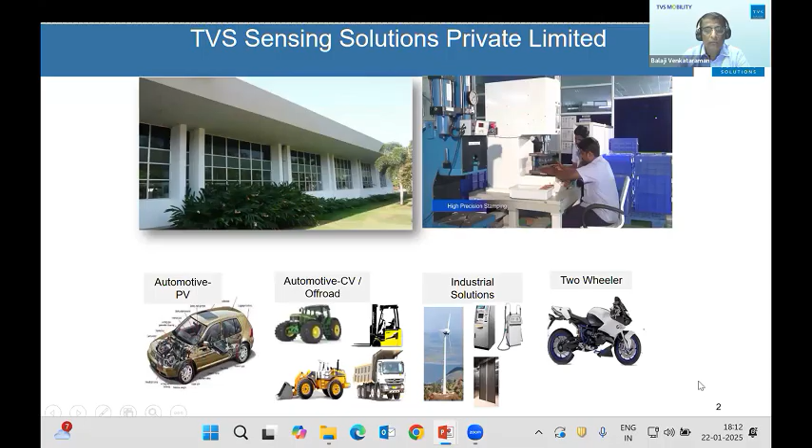I'm just skipping this slide. This is about TVS Sensing Solution, where I belong. We are in the field of products in switches, sensors, solenoids, and electronic component carriers, for 80% into automotive and 20% in industrial solution field. We also have a subsidiary called Fiber Optic Sensing Solution, which provides solutions in intrusion detection systems for digital corridors, at the India border, and for oil and gas, such premium segments.

So today's topic is going to be Industry 4.0. This is called, in some places, a kind of smart factory. Germany and other European countries call it Industry 4.0. The American world calls it more of a smart factory, and the research world calls it CPS. So different names, but it all means the same thing - a kind of interconnected things.

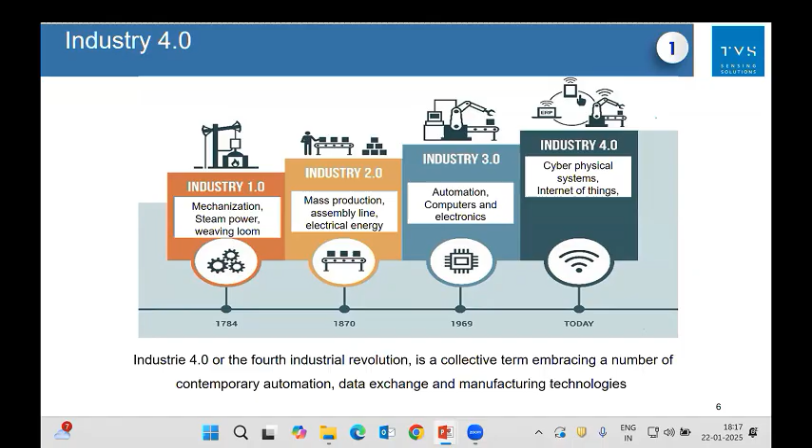Another definition: this is the manufacturing side of digital transformation. When you say Industry 4.0, or CPS, cyber physical system, it can be anywhere. When it is applied in an industrial setup, then it is called Industry 4.0.

So there are some basic questions. Is it different from M2M? No, M2M is a subcategory of IoT. After IoT evolved, I think all other things in automation—whether mechanical, electrical, electronics, or software—have become subsets of Industry 4.0.

Was smart factory different from Industry 4.0? No, it is related to smart manufacturing. It's just how you call it in different regions of the world.

The strong definition for IoT, or Internet of Things—the T always stands with a capital letter, so that's how you write it: Internet of Things. Internet of Things is a concept of connecting any device to the Internet and to other connected devices, through either wired or wireless networks, for exchange of information and knowledge for new value creation. This is the most widely accepted definition, though many definitions are available.

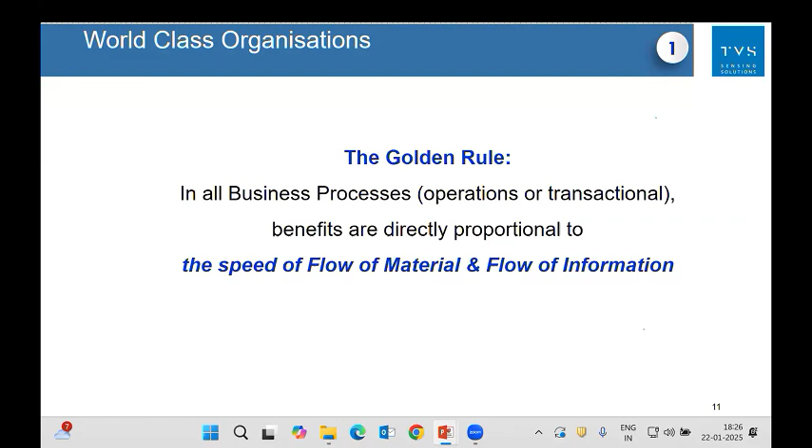If the flow of information is as fast as the material, then it is a very efficient or effective line - that's the way you can push. So let me repeat: in all business processes, benefits are directly proportional to the speed of flow of material and flow of information. This is the golden rule for any world-class organization.

So with this introduction, we have just seen what CPS or Industry 4.0 or Smart Factory is and what it constitutes, right - starting from sensors to some analytics to connectivity network. Then applications are built over that. Once the application is built, it can be called either smart factory, smart home, or smart bin, whatever you call it - so many applications it can do.

And when it comes to industry, we have to remember, if you want to become a world-class organization, both material and information has to flow together and faster - that's the most important thing. So for understanding IoT, I think the best thing is to understand the application. Let us start with the general application, then move on to industrial application.

Let us take this fridge. Normally when we have the fridge, probably you know that this is for preserving the temperature. So food products, whatever you want to preserve at a temperature - monitored temperature, the range, whatever you fix - this can be good.

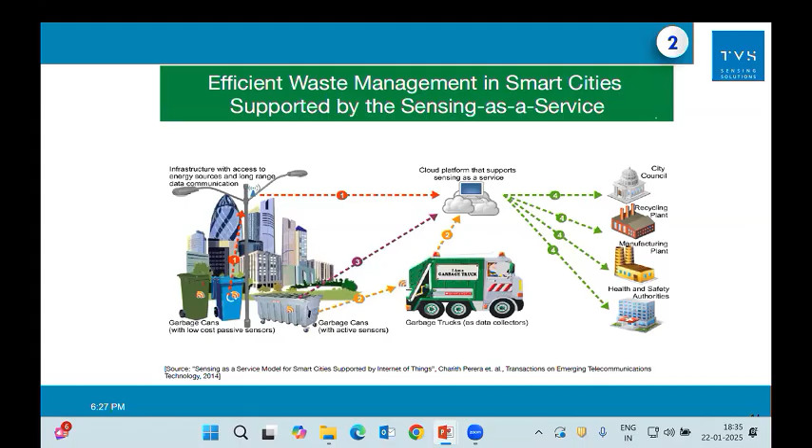If you start talking like this about every appliance, you can see smart thermostats, connected cars, activity trackers—it's like Fitbits, whatever you have, Ola cars for example—and smart outlets, for children not to put their hands there. The moment somebody touches, it goes out of power. Those kinds of smart outlets, and parking sensors.

When you go to cities now, Bangalore-kind of cities are becoming very, very traffic congested. So when you go to a mall, you don't know whether you're going to get a parking space. When I travel to New York or Chicago, those kinds of cities, you are very well informed before entering a parking lot—on which floor, which parking lot is available. This is possible by connecting the car to the parking lot sensors, where location availability is shared, so you can straight away go to the parking lot and occupy it.

That way, imagine you're going on a street—similarly, on the street side, you need to park where a spot is available. That information will come on your smartphone or device, so you'll spend very little time identifying and selecting a parking spot.

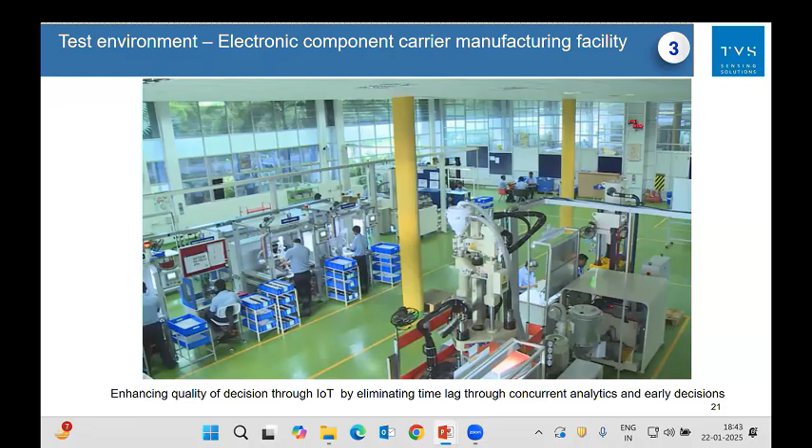So we want to enhance the quality of decision by incorporating IoT, and also we want to eliminate time lag through concurrent analytics and early decisions. This is our aim in the test environment. We did this somewhere around the 2016-17 range. I'll explain how it was done.

Imagine there is a product which you are seeing on the screen. It has to go through around 11 machines. I think up to M10 it is shown here, but actually it is 11 - you will see in the subsequent slides because EOL testing is also considered as one station. In the first station, there is a stamping press where three-dimensional stamping is happening.

Then there is a pre-mold in M2, in a Multiplast 85-ton machine. Then there is a piercing or trace cutting operation happening. Then there is an overmold operation in JSW 160 ton, followed by a thrust plate assembly. Don't worry about what the process is - take it this way: there are 10 or 11 processes for making a product. It has to go through a sequential process from M1 to M11.

So this example shows a realistic, real-time product, how these machines are connected with the IoT, how these processes and people are connected to IoT, so that we are able to monitor it on a real-time basis and take good quality decisions on time. That's the content of what we are going to go through today.

For all practical purposes, imagine it is going through X number of sequential processes, one by one, and when it finally comes out, it goes to packing. This is the assembly process layout. I hope this is very clear, right?

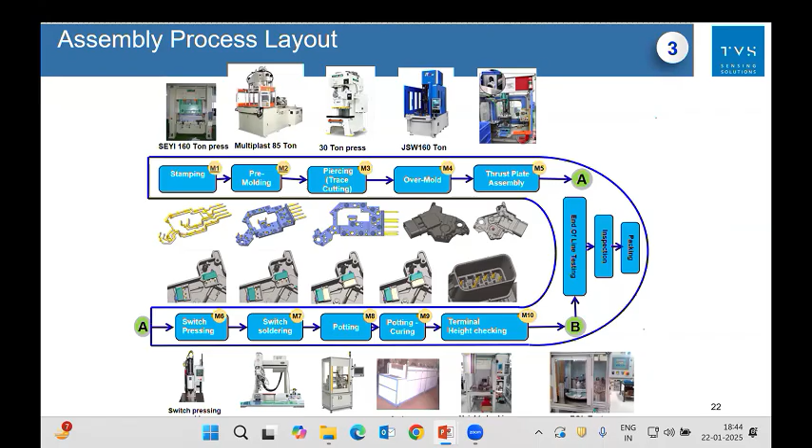Phase 1 is about fitting sensors to each of these machines, and it defines the connectivity between the sensors and the machine on the shop floor. Imagine that if there are 10 processes, all the 10 processes have sensors to detect the process happening in that particular machine. That's the way you can imagine it simply.

Phase 2 is data acquisition. Through these sensors, everything is connected to the IoT IO panel, the input-output panel. I'll explain that later. This IO panel itself gets upgraded to PLCs and later to some light protocol. I'll come to that later.

But when we built this first, we imagined that sensors are fitted in all 10 processes. Each machine has a sensor that identifies when the intended process is completed in that particular machine. When the process is done, that information is passed on through the IO panel. That's the data acquisition stage, phase 2.

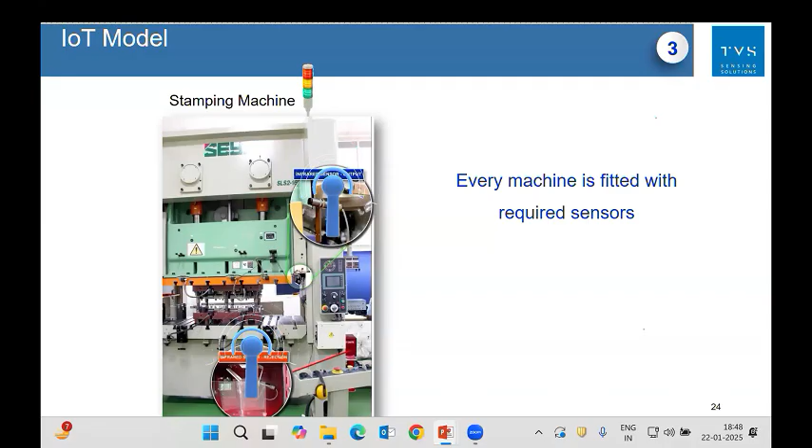This is one machine. Likewise, you have 10 or 11 machines, each with an intended process. That process is monitored and measured. The sensor sends the signal, an analog signal, to the IO panel, which is what you are seeing here. So the IO panel captures the signals from the machines. Now you see, from the machine, sensors are sensing and sending these analog signals to the IO panel.

Similarly, you have an ERP system where you can input, for example, an order for 100 products. This process involves making the PO and sending it, and the material—you have to draw material from stores. So all these things are done through software which is called ERP.

So raw data from there, the PO is generated and it goes to the database server. Then whatever material is processed in the machine, that goes through the IO panel, and analog is considered converted into digital, and it goes to the database server.

Similarly, the person working in that particular machine also intervenes through a HMI, human machine interface. For example, let's say there are critical processes where only qualified operators are allowed, like the CE press. Out of 100 workers, only 5 people are trained in that. By putting either thumb impression, face recognition, or keying in a password, only these qualified people will be allowed to operate the machine. The moment they put their punch in, the machine will recognize that the right person is operating it.

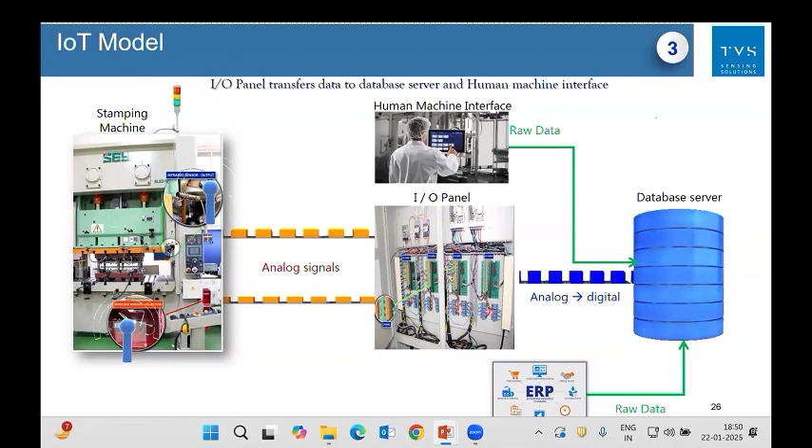This information, raw data, also goes to the database server. By this, we are connecting the order, the person, and the machine. All three M's are connected: material, manpower, and machine. All three are connected, and this information is going to the database server.

This data is transferred to application, data analytics. The application will have several softwares by which this will transfer. For example, I'd like to understand what is the level of rejection, or what is the kind of speed efficiency, what is the kind of OEE - availability, quality, and also efficiency. All three put together, that's called OEE.

So this information will be calculated instantly during the process, and this information is shared through SMS or through messages. Today, there are many formats available. So you send it to your mobile, your laptop, your desktop, or any data visualization panels available in the shop floor. So anything you can do.

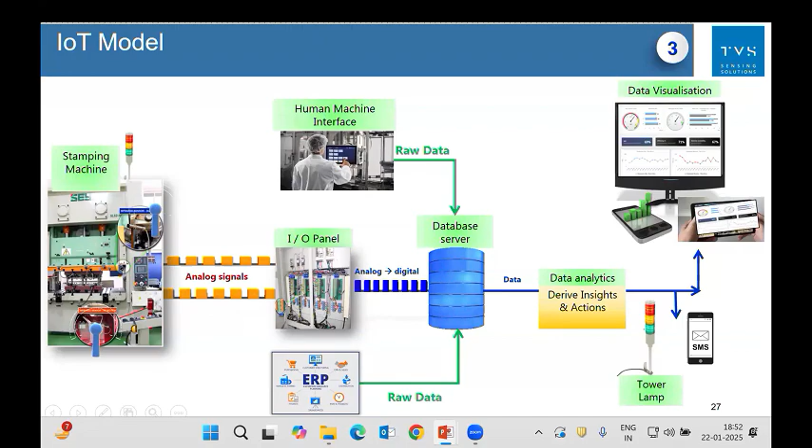Not only that, let's say there are quality rejections or more in some particular machine. This information triggers a tower lamp, which gives a kind of red light or yellow light, depending on the need. Whoever the quality inspector is in the bigger shop floor, they will understand - that's called the andon lamp. So wherever this red lamp triggers, he will approach that particular position quickly to render whatever help is needed.

So whatever I explained so far, you can see here, there are 11 processes, 11 machines, and 11 sensors - 1 or 2 sensors fitted in each machine. The data is transferred as analog signal to the IO panel. Simultaneously, ERP transfers raw data.

Human machine interface sends the data about the manpower when he is getting into that with either thumb impression, face recognition, or password. And all this formatted data goes to data analytics software, and the output is shared, in whatever form required, to different output devices. Okay, this is the entire IoT model - physically how it is connected and how it is working. Hope this is very clear.

Now, when we did it in 2016, 17, that's the way we did it. Later, with the advent of technologies and for troubleshooting, we started connecting them through master PLCs, replacing the IO panels. Master PLCs are taken and it goes to the edge server, and through that it goes to data analytics, then to the output devices for alerts. So this is the existing setup of gateway.

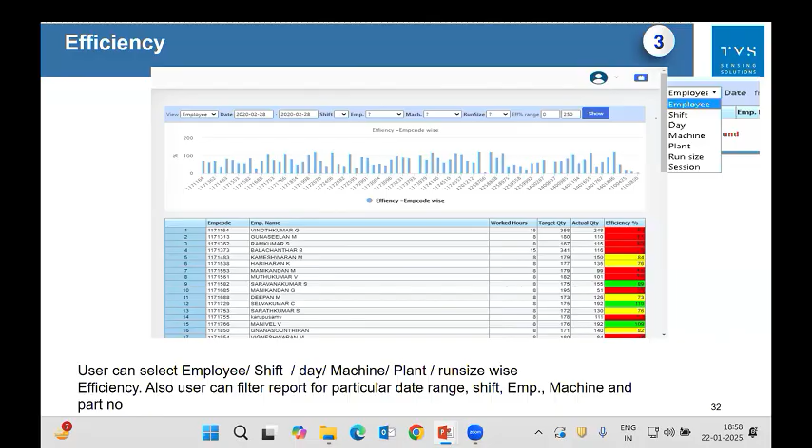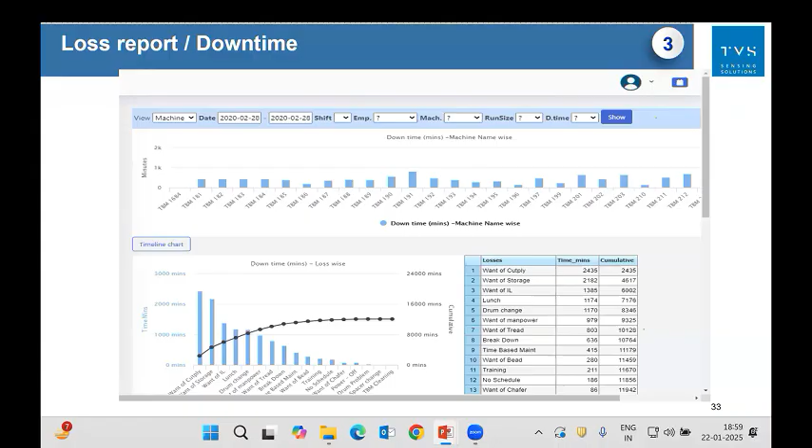Loss report - downtime. All the reasons can be put on that, like want of cutply, want of storage, want of IL, lunchtime, drum change - whatever possible causes there can be for loss of output, that can be put in, and you'll be able to analyze it using either an 80-20 rule, or you can create a Pareto chart and start knocking them one by one so you can better them.

This can also be used for rewards. For efficiency, if you know who is doing best, you can probably recognize them by giving some kind of awards or compliments - that's all possible, right? Everybody in the system knows, starting from the person operating to the supervisor to the manager to the general manager to the board. Everybody knows what's happening, and it's very transparent.

So manipulation of data is also completely avoided. Finally, you can get the OEE report. So many things you can do, like rejection entries, the QA person can find out.

The plant layout view you can have. Shift-wise efficiency you'll be able to see, and top performance on every shift. Top losses in the past 3 shifts consistently, you'll be able to find out if there's a loss somewhere. Operator-wise rejection quantity you can also find out. So many things you can find.

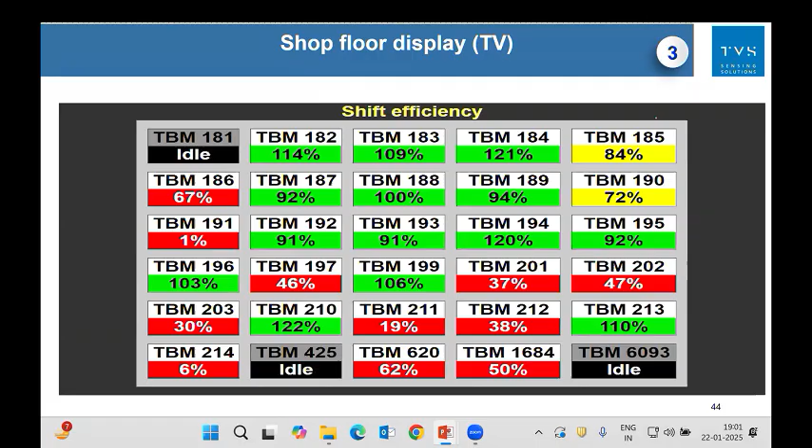Whatever data you have, if at the end of the shift you find that it is only at 70% efficiency, the 30% lost in the first shift cannot be recovered, right? It's gone. Gone is gone.

But with IoT, all 3 data points - availability, quality, and efficiency - are monitored depending on the need: minute by minute, hour by hour, or every half an hour, whatever it is, so that in the next slot of time you'll be able to do the countermeasure also.

So at the end of the day you will be able to make up for it. Imagine a situation where you are likely to get 70% efficiency. Let's say you measure hourly, you get 8 chances for countermeasures within a shift, so your chances are better that you approach 100% rather than 70%.

So with this case study, I hope it's very clear. I'll get into it - I think we have time, another 10 minutes, I can explain the case study too. This is simply, imagine a problem case.

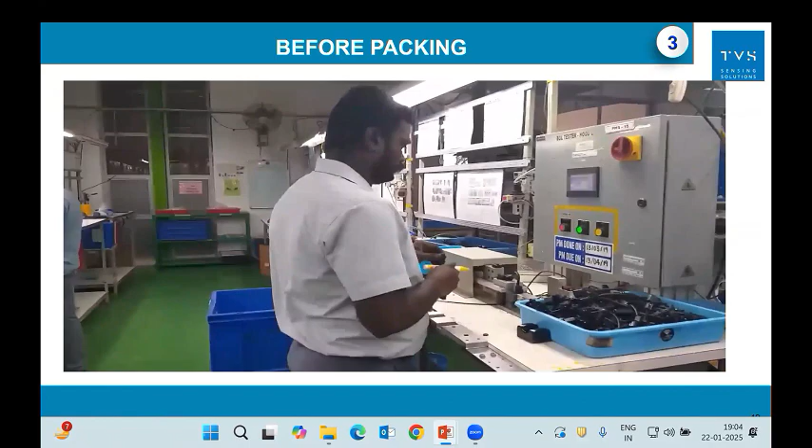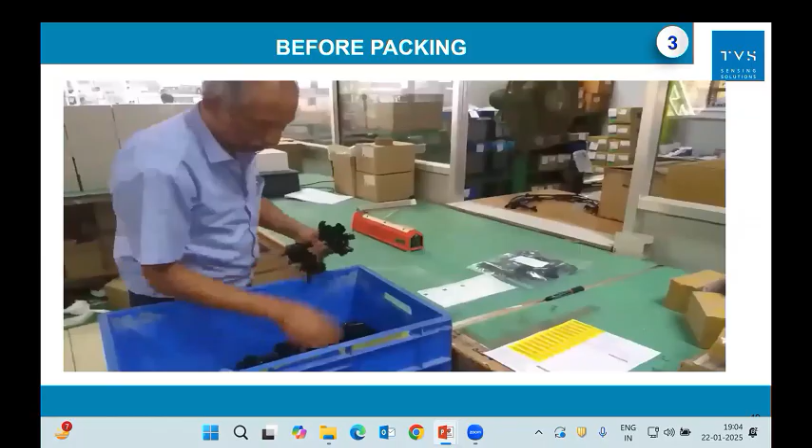It's a manual process where at the end of the line, you see the testing happening on the end of line tester. Once it's done, it's transferred to the FG store. You can see somebody is coming and giving the material, and this guy is going to put it - every 100 numbers he has to pack it. So he is also counting physically.

Just watch the whole process.

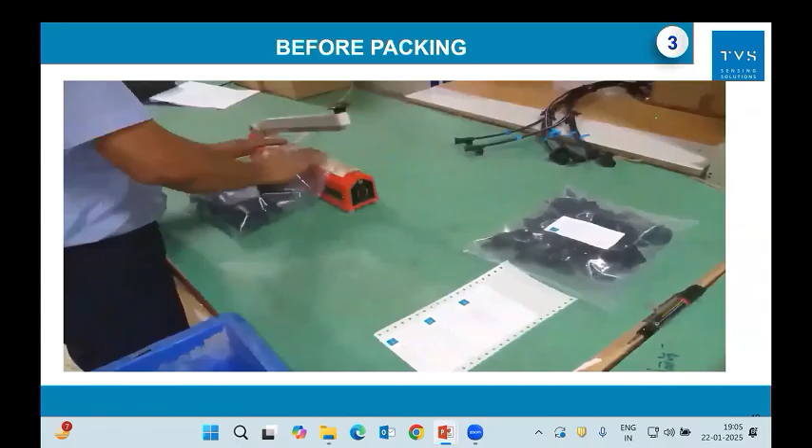So he has physically counted. There is a possibility of error happening here. Instead of 100, it could be even 95 or one or two, whatever. Once it is done, he is also pasting a kind of sticker. Then, as I said, 10 bags have to be put on a box, and he is doing it physically. This is how it is done on a kind of conventional system.

Now I'm going to show the entire process, how it got changed. You can see the new setup after doing an industrial engineering study. The entire thing got connected. You can see now even ergonomics is taken over here. The end of line tester is connected to a weighing scale, then to a QR code printer. Everything is interconnected.

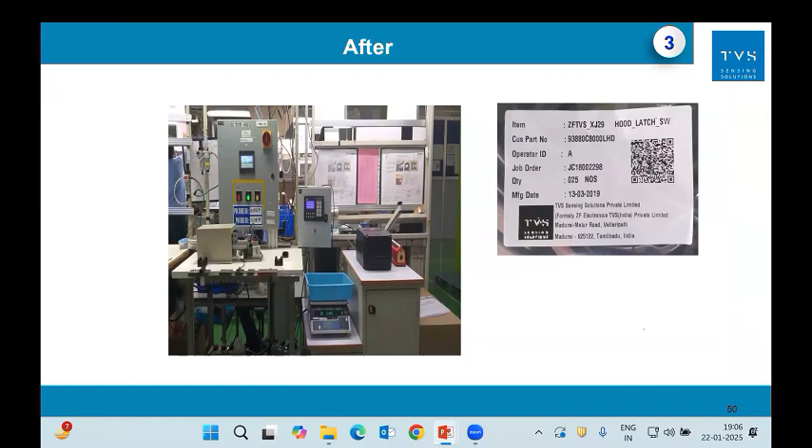Once you make the setup, what happens you see here? The same process, but now there is no more counting. He is seeing it and just putting it inside a plastic bag. This plastic bag sits on a weighing scale. The moment the number of items is good enough—let it be 50 or 100, whatever it should be—once it is done, what happens you see?

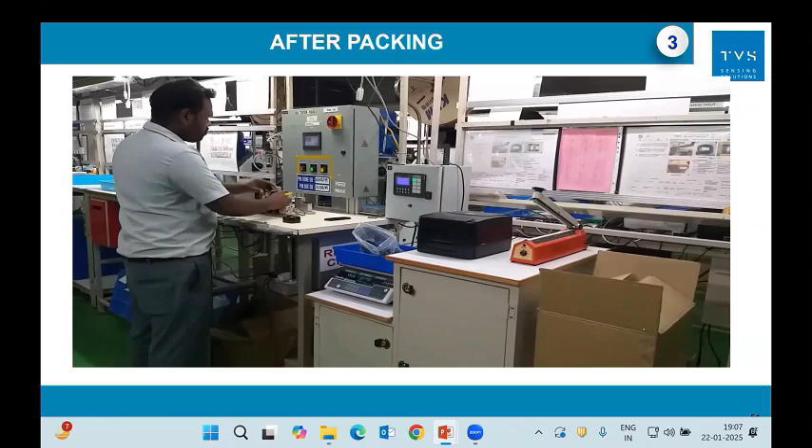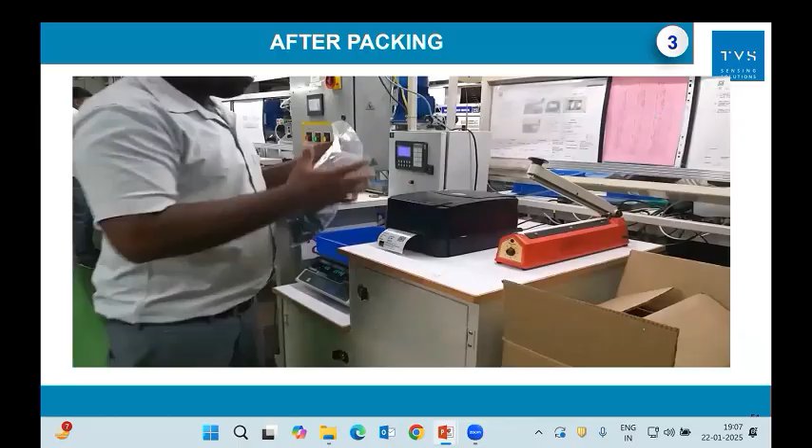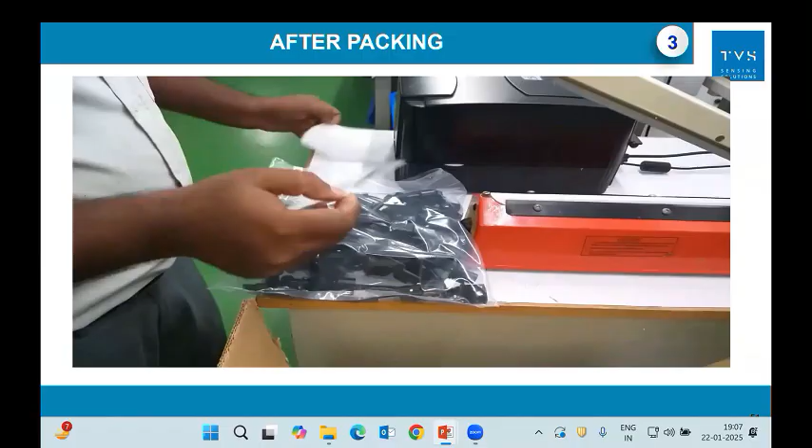There is a printer, and the printer comes out with a label. So you don't do anything, you don't count or anything. Automatically it is happening. It is no more shifted to FG stores; it is happening at the end of the line itself. So there is no chance of any error that can happen. Counting is replaced by weight based, then this is put on a box.

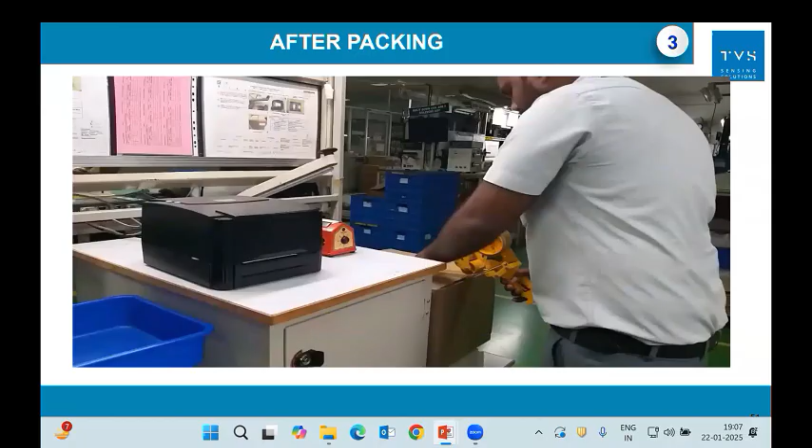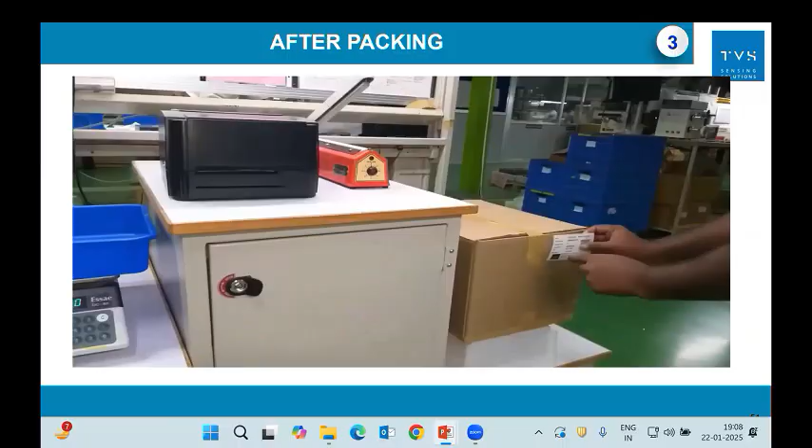Now, this also can be seen, after putting 10 items, you can have another system by which a printer comes out. Once he completes, there is a printer that comes out, then he is going to put it. So a lot of elimination of manual work is done and it becomes error free.

Now the customer is guaranteed, because when you are doing thousands, millions every time, there is always a possibility of manual error. The entire thing is now completely error free. That's what is happening.

So you can see, now the activities reduced from 8 to 3. Manual counting is completely eliminated. No re-verification. Material handling is completely eliminated. Auto generation of shipment tickets. No quantity errors in packing, and online inspection reduces inspection time.

Okay, so we still have some photographs. Of course, I'm not going to explain much how AI can be used in the inspection process, but some of the things—these are the intelligent systems used, a single axis robo for soldering station, this is all our line. So machine learning and deep neural networks help the vision system learn, distinguish between objects, and even recognize objects. AI is helping to bring vision technology into unprecedented territory. So AI enhances the capabilities of the vision system, making them smarter, more flexible, and constantly improving.

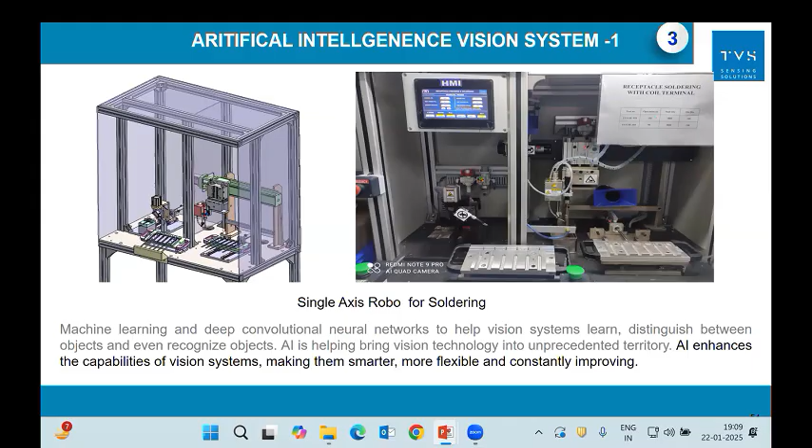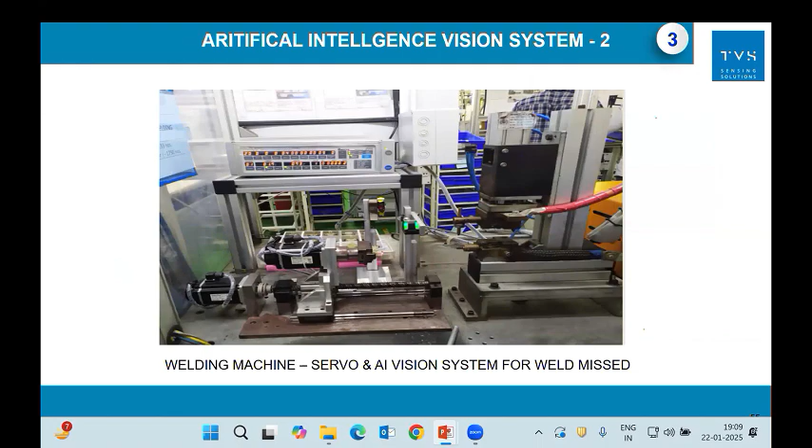What you cannot see with the human eye, now with this kind of vision system and artificial intelligence, you can take decisions much better. Similarly, you can see a welding machine where servo and AI vision systems are used for finding out any weld that is missed out.

So I think we have seen the shop floor case studies of IoT, which are very simple, but of course it's not as easy as I'm telling. You have to do a proper industrial engineering study to understand where the sensors have to be put, how all the resources involved—whether it is a human being, the machine, or the process—how they all can be integrated. Once it is integrated, you have real-time data and analytics so that decisions also will be quicker and smarter. That's what is going to happen.

What are the key benefits of industrial IoT or IIoT? Eliminate human dependency—you saw already the examples, you understood. Proactive decisions, shop floor real-time visibility, quality decision making, high accuracy levels, and resource utilization. These are the key benefits.

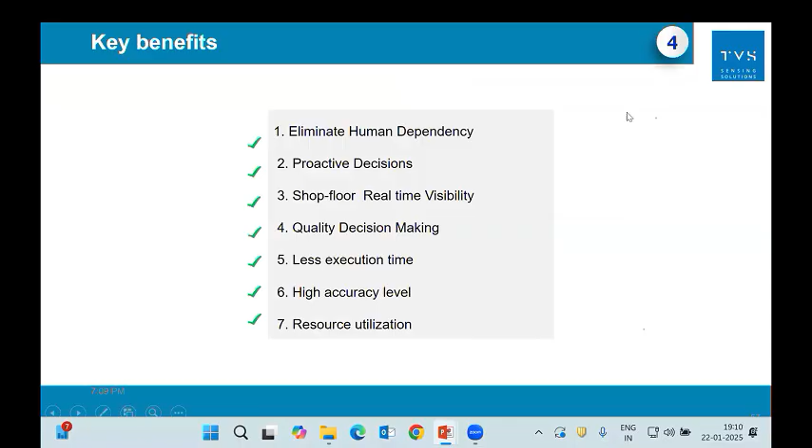See, the potential failures could be sensed well before occurrence and initiate a preventive maintenance loop to counter such issues. So it can become very prescriptive, not a post-mortem. And embedded quality data for ready retrieval—sometimes you can even embed all the quality data inside the product itself by way of some QR code or laser marking or whatever it is, you can do that.

And action oriented, it's all benchmarking. As I said, you can benchmark across the plants around the world. And it will definitely be a superior customer experience that is going to happen because of this kind of thing. So the customer experience can be enhanced to deliver higher value proposition. The IoT principle could be applied on the shop floor for automating information flow and improving productivity process.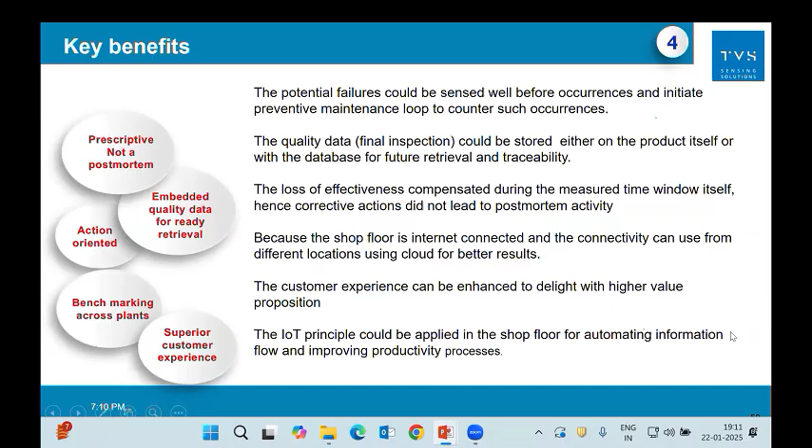What is the future scope for IoT? What happens to the world with the advent of IoT? There was initially a fear that it can affect jobs. But with automation or even AI, it's a matter of retraining. Instead of one job, it's going to be a more quality job, less tiring and more effective. So you can see it both ways - either it affects jobs or it creates new jobs.

Globally, one-fifth of the global workforce will be impacted by adoption of AI and automation. 50% of companies globally are planning to adopt Industry 4.0. It will impact routine manual jobs - anything repetitive. Today with AI, all the banks and many other things, you get automated calls and a robot talking to you. So many repetitive things can be replaced by AI.

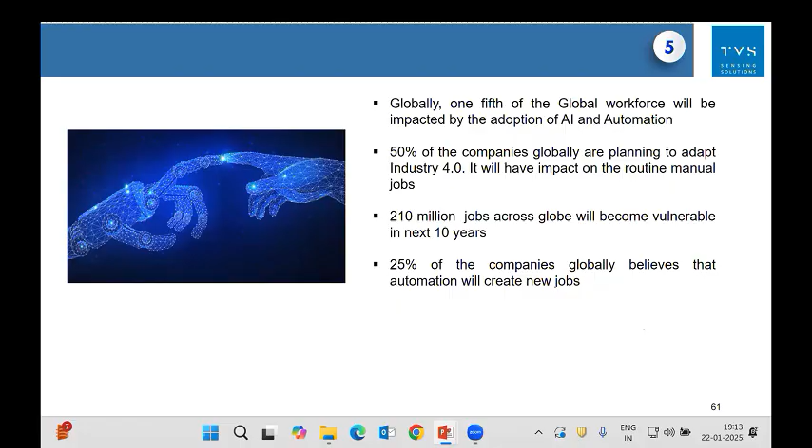Around 200 million jobs across the globe will become vulnerable in the next 10 years. Already it has happened. If you track what Elon Musk has told, it's going to have a huge impact in the market. And 25% of companies globally believe automation will create new jobs.

These are some statistics - 21 to 30% of new jobs will be created. For example, the introduction of computers created millions more jobs than it impacted. When computers came, the same kind of fear arose - that humans will lose jobs - but it created new skilled jobs, from computer operators to analysts to program writers and many more.

Similarly, IoT and AI are going to bring a new set of jobs that didn't exist before. Jobs where machines complement human labor will be created, such as robot operators. Yesterday we saw cobots - collaborative robots - which work with and enable operators for troubleshooting, monitoring, robotics, etc. Engineering skills across all disciplines will be needed to design, build, troubleshoot, and maintain Industry 4.0 technologies.

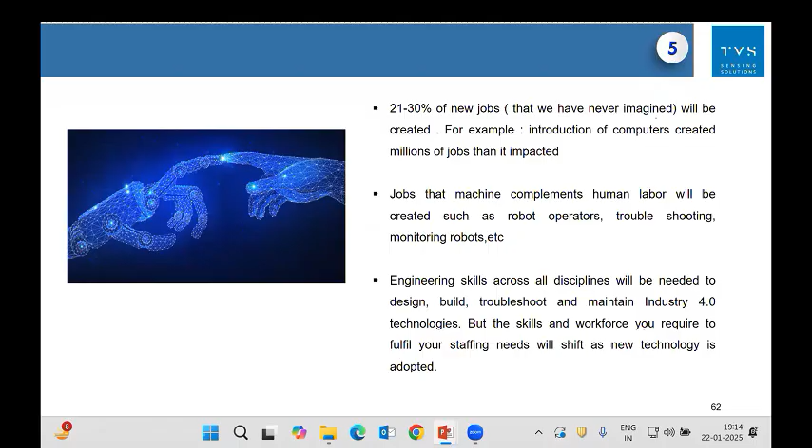The skills and workforce required to fulfill staffing needs will shift as new technology is adopted. As manufacturers change their business models to take benefit of IoT technologies, IoT-based applications can become new business models in manufacturing industries. Considering the application services perspective, it's essential to address privacy, security, and safety. Novel paradigms can be developed systematically in future IoT applications.

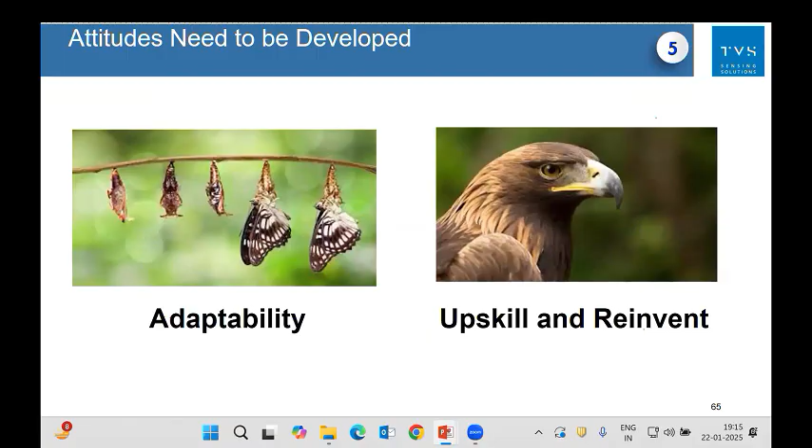Artificial intelligence and IoT combined applications are being used in many industries across the globe. Huge research scope is available in this area to seek competitive advantage by augmenting human intelligence. Further work can be extended to proactive decision support using artificial intelligence. Internet of Things is only the tip of an iceberg. What the change requires in attitude is adaptability, upskilling, and reinventing yourself. That's what is needed. Thank you.

I'll stop the presentation here and invite any questions you may have so that I can explain further. I'll come on the video now.

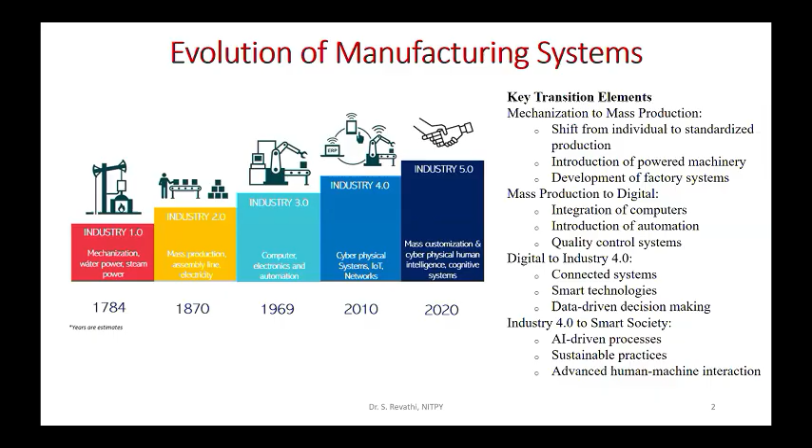So this is the evolution, or how it has transformed from 1.0, the basic fundamental traditional era, towards the future. Now let's examine the foundation of manufacturing systems before the 1970s, so that we'll be able to understand how we have come, and why cyber physical systems are present in such dramatic advancement.

So the first thing is the foundation, when you talk about it, is pre-1970s. You have manual assembly lines and fixed automation. Before 1970s, it is all manual assembly lines and fixed automation. The manufacturing was primarily very much linear, fixed assembly lines where workers perform repetitive tasks at the same station—stationary people doing the same task repetitively. That is called fixed automation. And you have human-operated machinery and tools. These are all the basic things that laid the foundation for the manufacturing system.

Then, if you see the documentation, you have to go with paper-based documentation and planning. So all production, your planning, scheduling, tracking—all were done manually. You can see how hefty and how trivial things would have been when it was paper-based documentation and planning. This was a major problem because it led to delayed information flow, difficulties in tracking real-time changes, and you have to imagine the volume of paper that had to be maintained.

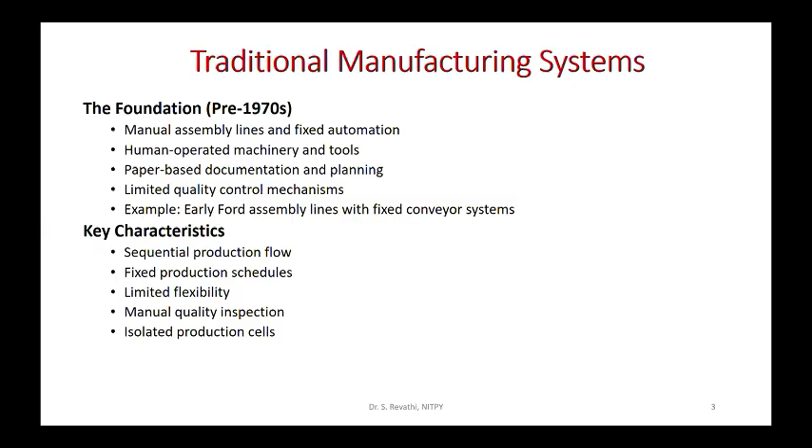Now let's explore what changed when you integrate digital technologies. How have these digital technologies transformed manufacturing from the 1970s to 1990s, the period where digital computers were introduced and deployed on factory floors? This is the period of digital technologies integration.

In early automation, the prime thing integrated was the introduction of programmable logic controllers, your basic PLCs, which started existing from the 1970s onwards. The first PLC appeared in manufacturing in the 1960s, and became widespread across manufacturing sectors in the 1970s. So we call this period from 1970 to 1990s the early automation period.

The basic feature of programmable logic controllers is that they replaced relay-based control systems. That's the point of emphasis here. With PLCs, you now have flexible automation being facilitated. That was the major breakthrough there.

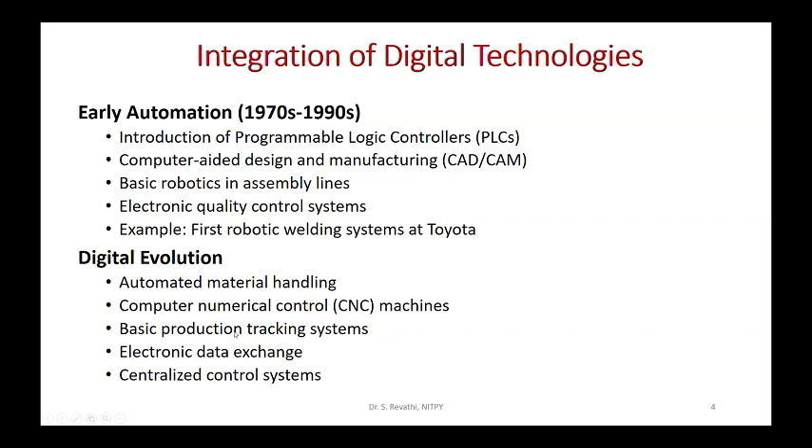Next, we'll have a brief overview of Industry 4.0. So generally, if you want to define Industry 4.0, it represents the convergence of cyber physical systems, IoT, and intelligent automation in manufacturing, enabling smart factories characterized by self-optimization, self-configuration, and artificial intelligence. So this is the basic one-line definition given for Industry 4.0.

When you see, there are four main pillars which hold up Industry 4.0. First is interconnection: machine to machine communication, human to machine interaction, and seamless data exchange. So these are all possible. First point to understand is the interconnectivity.

The next pillar is information transparency. You have digital twin technology, which we'll discuss further, real-time data collection, and contextualized information, that is information oriented to a context. For example, you're trying to collect data for quality control, so the databases of the best certified products are collected. All this is possible with information transparency, and it has been a major pillar in Industry 4.0.

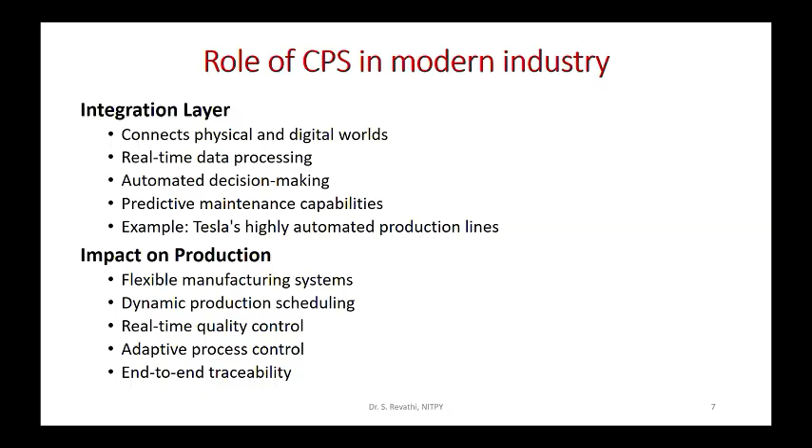When you look at the impact, you have flexible manufacturing systems, dynamic production scheduling, real-time quality control, adaptive process control, and end-to-end traceability - this is the impact it has brought in production. So very quickly, I will discuss the next few slides, which illustrate the transition from traditional to CPS.

So you can see how this has been emerging in the domain of CPS based manufacturing. It becomes generally self-optimized production, cloud or edge based. Cloud we've talked about. Edge is even more interesting because you're not transmitting data over the cloud. Your data processing and decision making happens at the edge level itself, meaning at the point of measurement itself, everything is happening. That's an interesting area to explore, edge computing, very much essential when we talk about modern industry.

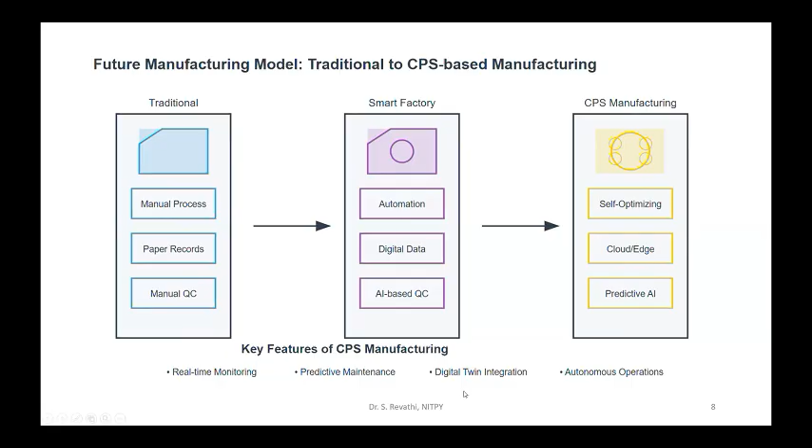Next is predictive AI, so the key features are being mentioned. These are the basic transitions that have taken place. This is how the key transformation elements have gone through, so you have two critical entities here.

One is physical to digital integration, and we also have digital to physical integration. Physical to digital integration means capturing real world data and creating digital records. Digital to physical integration means I take digital information and use it to drive some physical manufacturing process.

Under physical to digital integration you have sensor networks throughout the production line, real-time data collection, process twins, automated control systems, and smart quality management. Everything is covered when it comes to physical to digital integration.

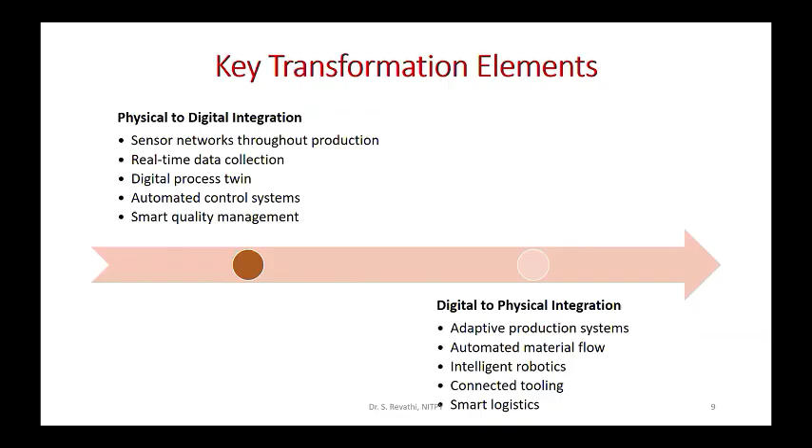For digital to physical integration, you use the digital data to improve adaptive production lines, automate material flow, and connect your tools. All this becomes a consequence of digital to physical integration. This is the key transformation, and as I told you, this is a quick visualization of the Mercedes-Benz 56 factory floor.

I'll just quickly show it.

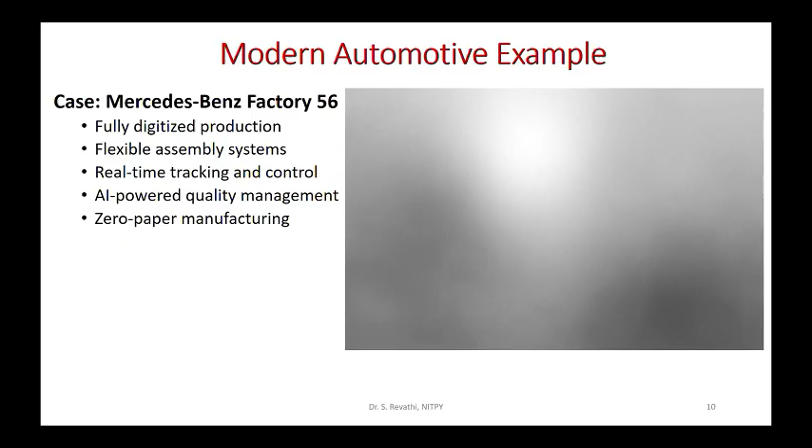Along with this we have Tesla. If you consider the automotive industry, you have Tesla, you have BMW, everybody working on this, trying to push their boundaries to show what is possible with this modern production environment. So that's the basic thing, you would have visualized it in this video. So quickly let's understand.

When we talk about manufacturing sectors, two benefits we have to consider: one is manufacturing benefits, and the other is business benefits. Let's start with the manufacturing benefits.

Now you've understood how CPS has been remarkably integrated in the production line, as you witnessed in the previous video. Now imagine how your manufacturing system can bend and flex with your needs, whatever is needed can be imagined and done. So that's the first thing, increased flexibility. You can see what the customer needs and how the manufacturing sector has to be altered, it's very much flexible, that's what needs to be emphasized.

It's like having a good game. Say for instance if you have a good athlete in the ground, understanding the scenario, how he has to pick up speed, understanding the gaming situation, how he has to perform. That is now the requirement of all factories. So first is how flexible your manufacturing levels are, that's the first point.

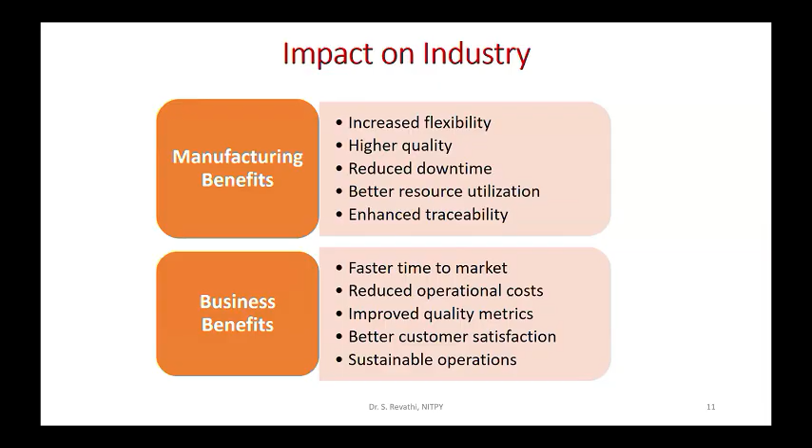The next is sustainability. Everybody is interested in this last step, because as we move from era 4.0 to 5.0, one of the important keys for future manufacturing sectors is sustainable operations, where automotive plants are not just efficient in producing but also environmentally responsible. That is also a part of business nowadays. So these are the impacts on manufacturing and the business benefits.

Now quickly I'll lay down the CPS foundations. Let's talk about the CPS foundation.

The first thing is computation, networking, and physical process getting together - that is what we understood as CPS. It's typically equivalent to an orchestra: the instruments are like the machines in the factory, the musicians playing are the computers or computing platforms, and the conductor is the network. All three components in an orchestra have to work in harmony. That is the integration of computation, networking, and physical processes - your physical process is like your body, your computation is your brain, and your networking is your neural system. If all work together, then it's perfect. That is the integration of the entities when it comes to cyber physical systems.

So the core concepts are three main ones: real-time operation, intelligence, and connectivity. When it comes to real-time operation, it's like something happens on the factory floor and there is no time for delay - the system has to react immediately in the right way.

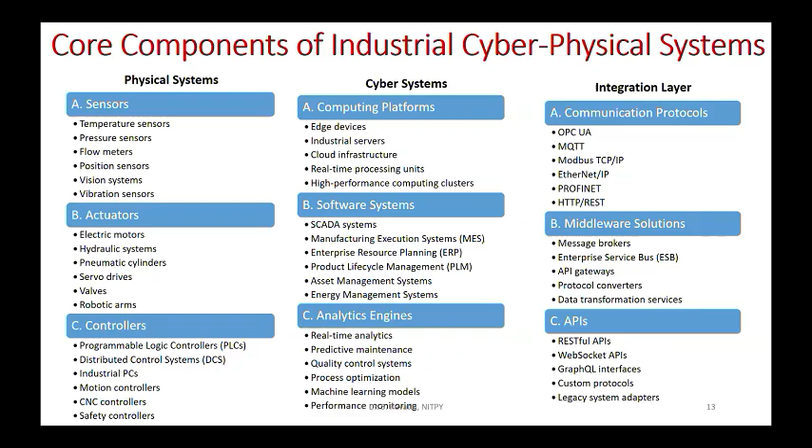Next, you have middleware based solutions like message brokers, ESBs, and API gateways, which also come under integration layers. Next, you have API components like WebSocket APIs and legacy system adapters. You might have an older version of the system in a modern factory, so you should have a legacy adapter for it. All these comprise the integration layer, which interconnects your physical and cyber entities.

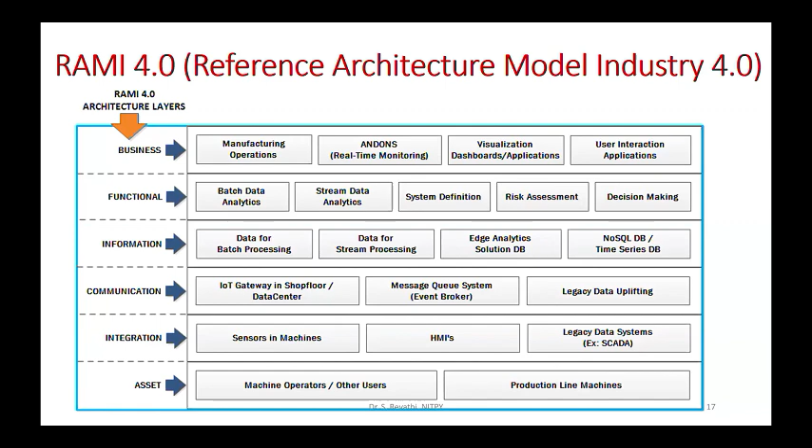So that is the 6 levels of layers that are part of this RAMI, the reference architecture model for Industry 4.0. This architecture provides a structured approach of implementing the Industry 4.0 concepts for seamless integration right from the factory floor to the business level. This is one reference model that has been followed, and this architecture is being utilized in multiple organizations. So just a depiction of it.

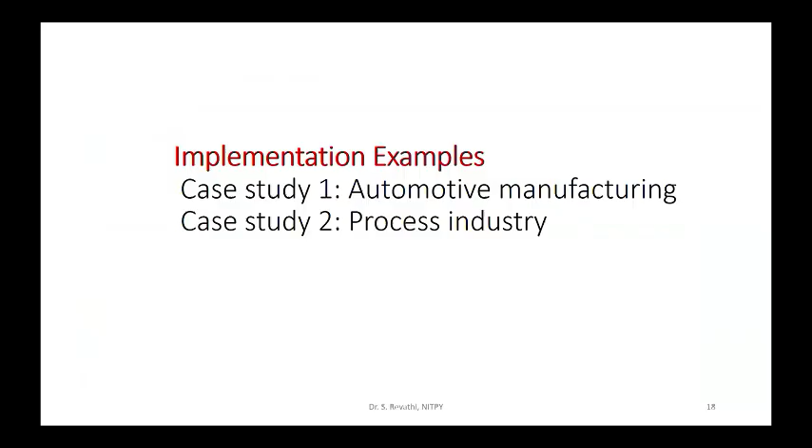Now we'll quickly get the implementation examples, which comes as part of automotive and process industries. Maybe I'll just go with automotive industries, manufacturing sector. When it comes to the automotive factory, the same features as you would have witnessed in the previous video. You have the factory where everything is connected. You can have the assembly lines to the quality control. Everything is getting automated or connected.

You have smart assembly lines that can adapt, or we call it reconfiguring itself to adapt itself. Next you have automatic quality control, which is catching the issues before they happen, before they become huge problems. We are trying to catch it up. So that is the automated quality control.

Next you have real-time monitoring and control, that gives you instant insights - monitoring, processing, analytics, everything happens in real time. Next is integrated logistics systems, which tells you exactly where everything is and where it needs to go - what is the next item that has to get into the car system. That gives you tracking of the logistics in the supply chain. So that is integrated logistics systems.

As part of it, the key objective is very clear cut. We are trying to bring about zero defect manufacturing, which means we are aiming for perfection in every product that we produce. Every product that comes out, say for instance a car manufacturing organization like BMW or Tesla, everybody is interested in zero defect, because perfection is very important, there is no compromise on the product quality.

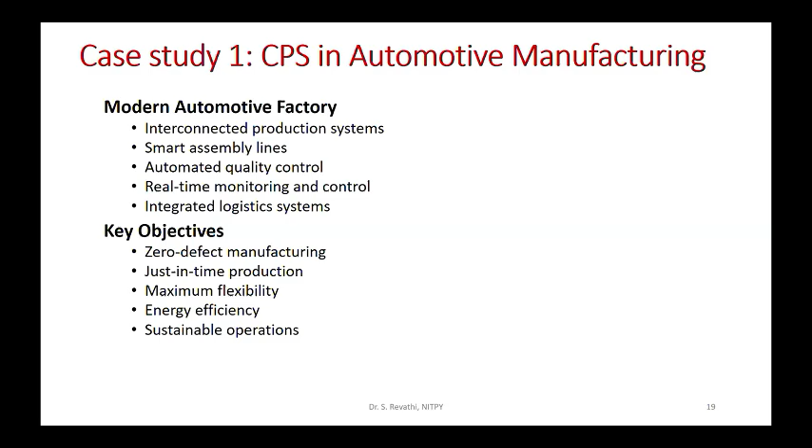So that is important. Next is energy efficiency, the smart use of resources. This is very important because the manufacturing sector is very much interested in energy efficiency and sustainable operations, which is going to be the next era - how environmentally responsible we are, just reiterating it. So these are the key objectives when you're trying to introduce CPS in the automotive manufacturing sector.

As we have seen earlier, the layers available in the CPS architecture are the physical, cyber, and network. Very quickly, if it is an automotive manufacturing sector, the physical layer would be having hands-on components like your robotic assembly systems, and the task handled by it would be welding task.

A robotic assembly system will be taking up the painting application task, or the assembly line robot, anything it can be. So the first thing is that in an automotive manufacturing sector, you will have robotic assembly systems and quality inspection systems.

Quality inspection is something we are working on recently. Almost all industries have come with vision-based systems for quality inspections, having pattern recognition algorithms or vision-based algorithms working in hand with AI. Next is the material handling systems, which will include your automated guided vehicles (AGVs) and smart conveyor systems, all part of the material handling systems.

These will comprise the physical layer in a typical automotive industry manufacturing sector. Moving up, we have the cyber layer. This is where, as I told you, the brains of the operations live - that is the core component.

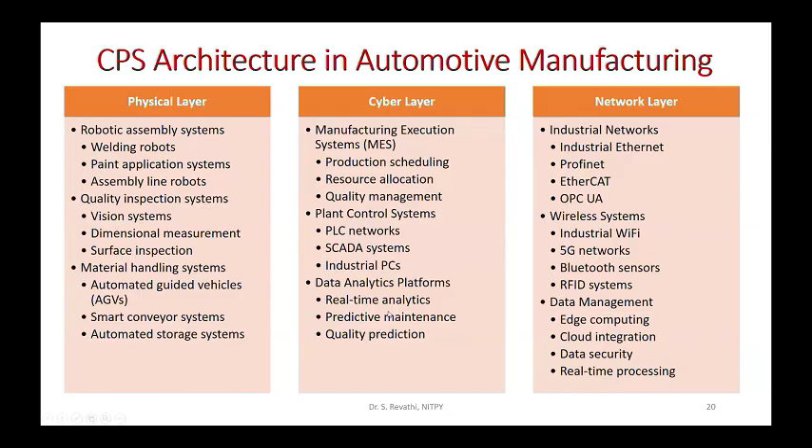Now I will let you know about a paint shop application or functionality which is very basic and available, something everybody would understand. I'll take up this paint shop system and explain the CPS applications and machine learning with digital twin technologies, how it is being deployed in the automotive industry under the functionality of paint shop.

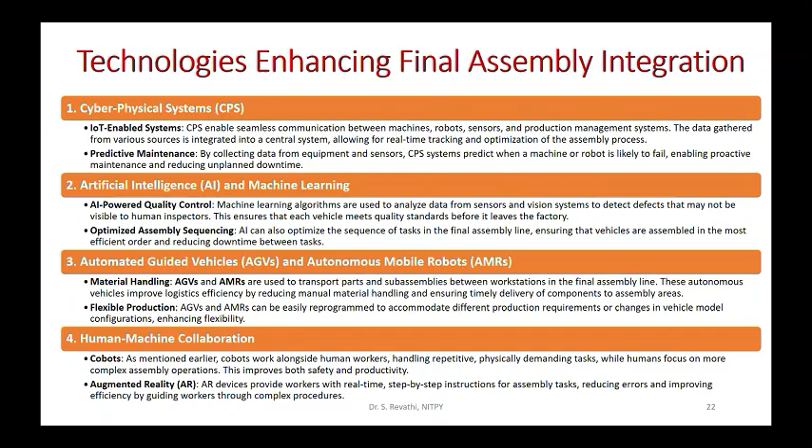Quickly into data integration and analytics. In modern manufacturing, data integration and analytics plays an important role. Not only collecting the data - your data sources can be anything, it can be process data, sensor data, or quality data, whichever is there - we have to store it and go for analytics.

When it comes to analytics, you have two categories: descriptive analytics and predictive analytics. Descriptive analytics is something like what has happened, how well did the manufacturing process perform - all that visualization is descriptive analytics. If you take the history of data and build a machine learning model or time series forecasting algorithm to predict future outcomes, then it becomes predictive analytics.

In either case, you are making use of the data coming out of the factory floor. So two types of analytics has to be done - this is how analytics are used in the automotive sector.

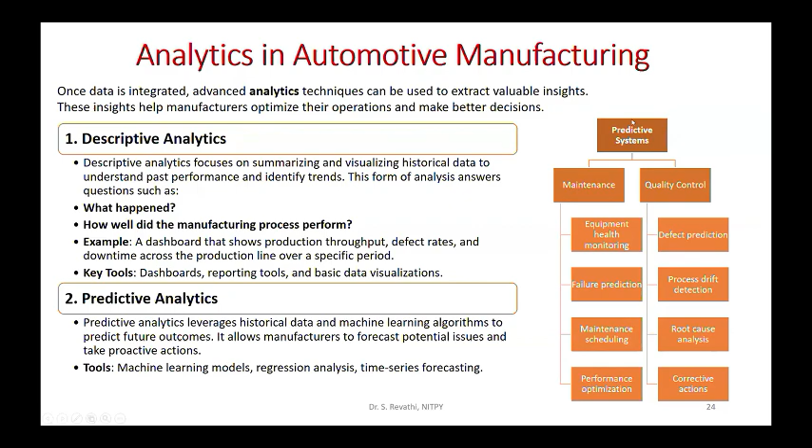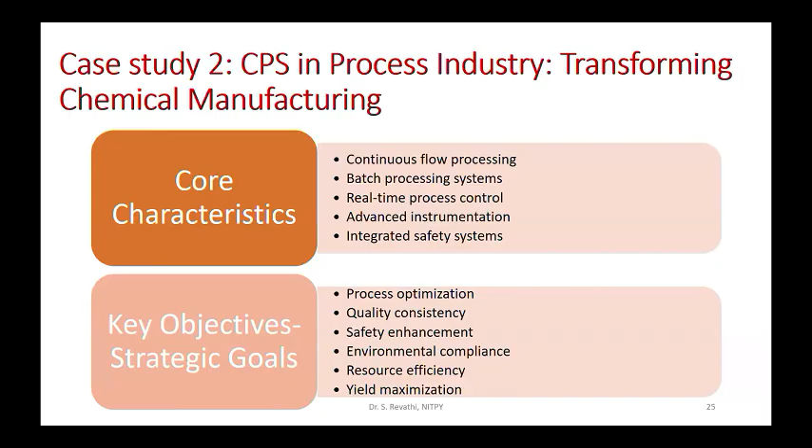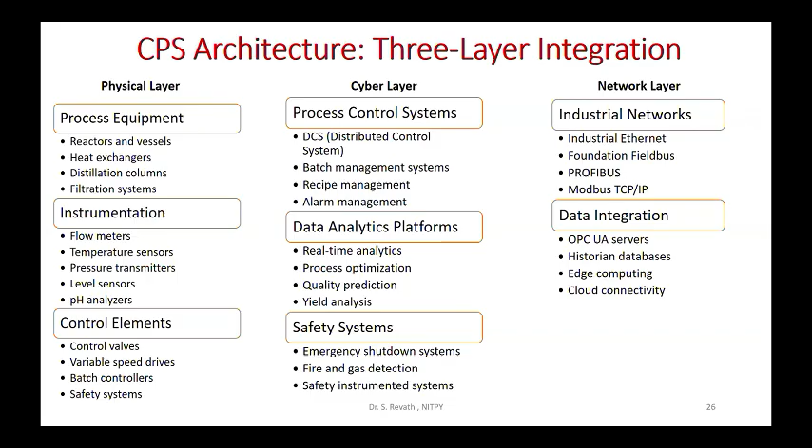I'm just quickly skipping off this process industry application because it is quite repetitive. Be it any manufacturing sector, the core characteristics and key objectives are going to more or less remain the same. In a chemical manufacturing sector, you have some additional entities like safety systems, fire and gas detection. So there are some alterations, but apart from the physical layer and safety systems, all would remain the same, because for any manufacturing system or factory floor, the basic architecture is this three-layer integration and the technologies.

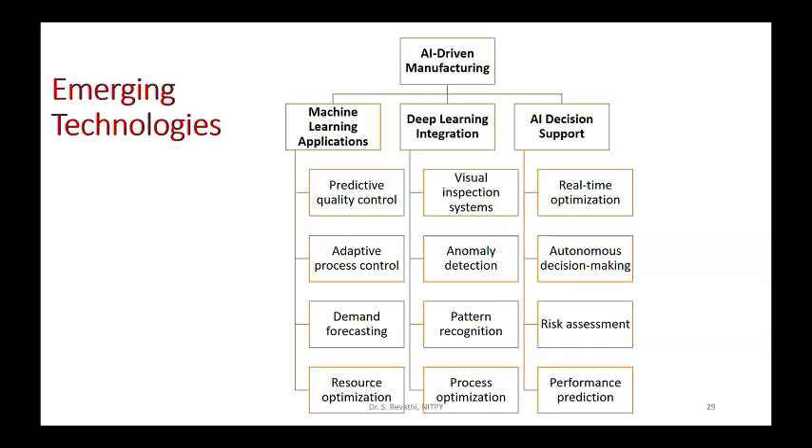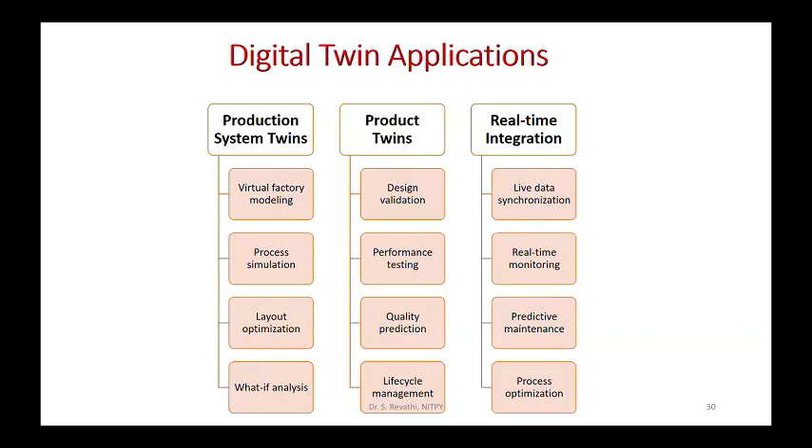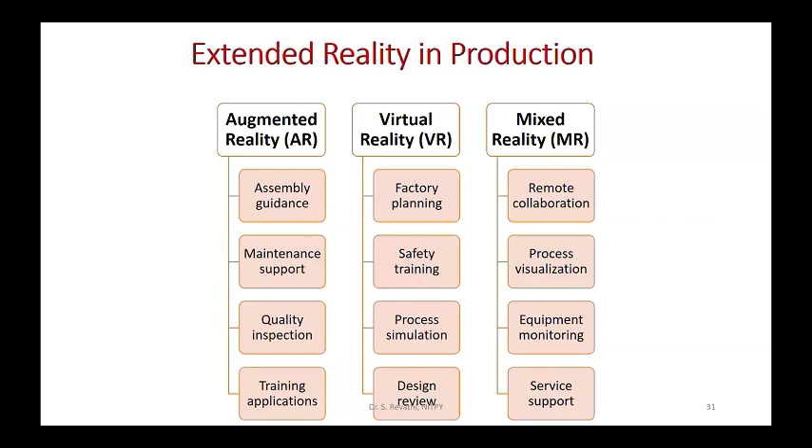Next is extended reality, another possibility in the production line. As part of extended reality, you have AR, VR, and mixed reality, supporting various forms in the industry.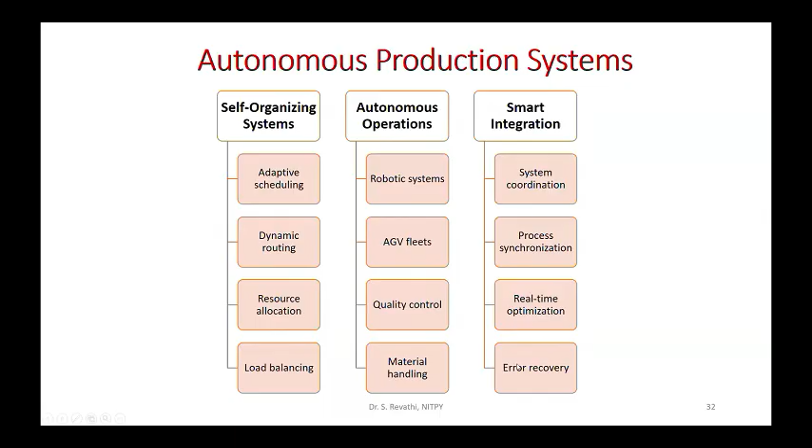Next is future trends. We have seen emerging technologies and the phase of implementation of CPS in manufacturing, but there are implementation challenges. Although these emerging technologies are available, you have challenges like system integration, because you are trying to connect a legacy system to a modern factory setup, which is very challenging.

Your standards and protocols may differ. Since it is CPS, you are trying to transmit sensitive manufacturing data, so a very important aspect to look for is data security, data privacy—because it is the organization's data—and compliance. That is part of the other implementation challenges.